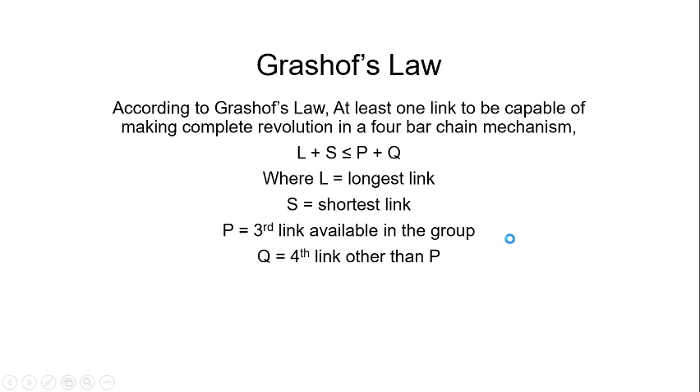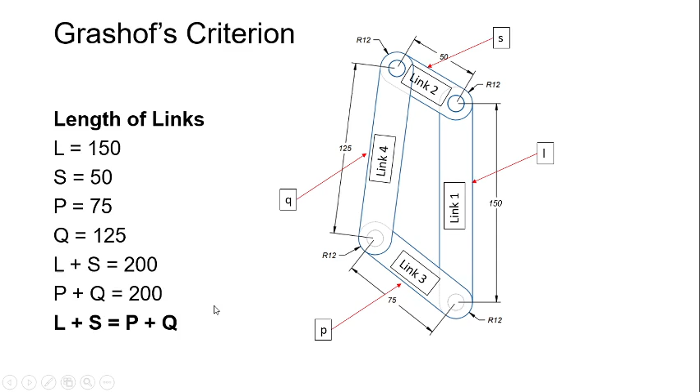Earlier we used the longest link as 145. Now I am going to use a bigger value, that is 150, and remaining all dimensions I am maintaining the same as before. So by doing that I will get L equal to 150, S equal to 50, P equal to 75 and Q equal to 125. So L plus S equal to 200, P plus Q equal to 200, and L plus S equal to P plus Q. So we are going to evaluate whether it is possible to make a rotation or not.

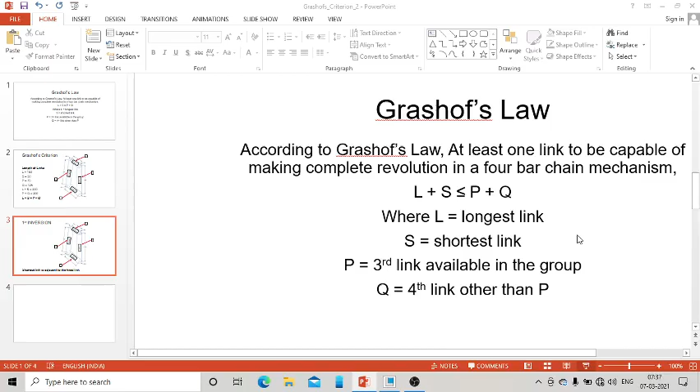In this particular video I am going to use all the examples which we have used earlier, the same links. So what I have done is I have copied that folder and deleted all the assembly.

Now if I go for new, before that let me modify one of the links. So the long link I want to modify. Open this.

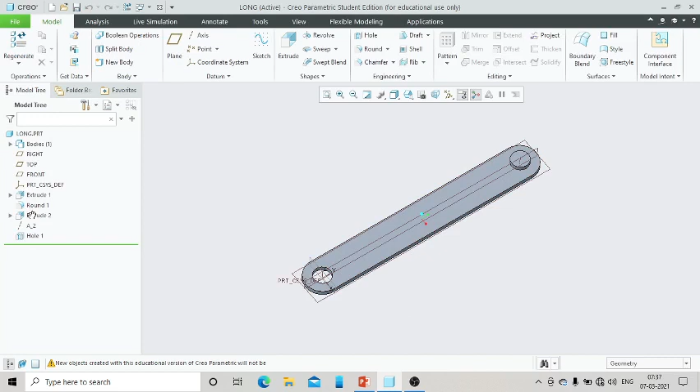Edit definition. So this 145 I am going to change to 150. Remaining all the values remains the same.

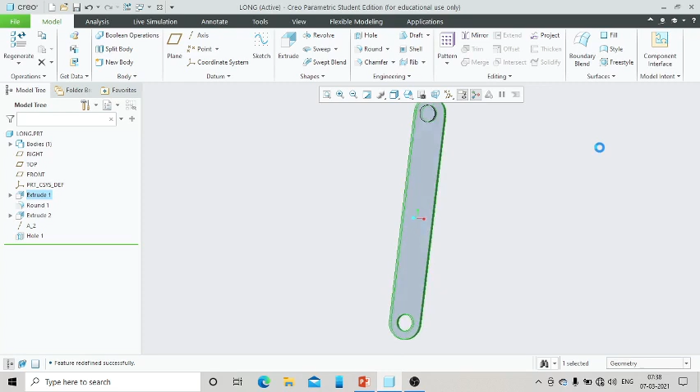Control D, so this is the default orientation. Regenerate, save. Then I want to prepare manage file, delete old versions. Yes.

File, close. Now we are going for new assembly, and this is let us go for the first inversion. Mechanism 1, okay let it be 1, 4-bar mechanism.

MMNS ASM design ABS, description, okay, Grashof.

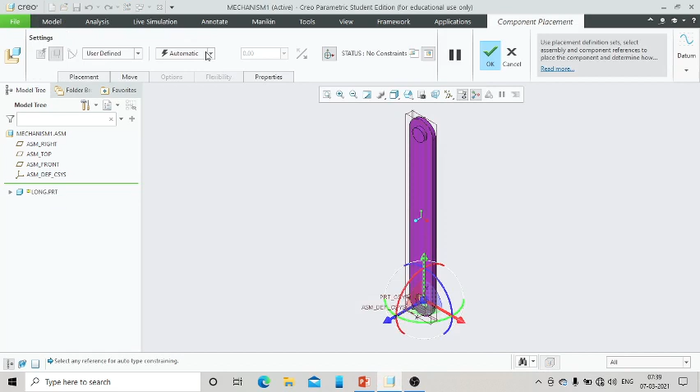Then okay, let us assemble the L link, long link, open. Then this one we are going to make it default.

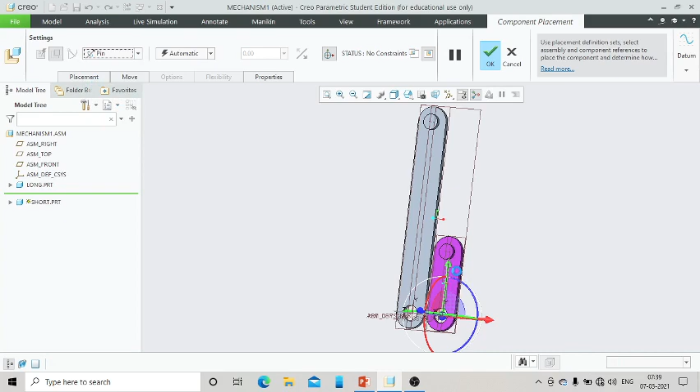Now we are going to assemble once again. Now we will assemble the short one, open. Then we are going for pin joint, pin joint. So this axis and this axis.

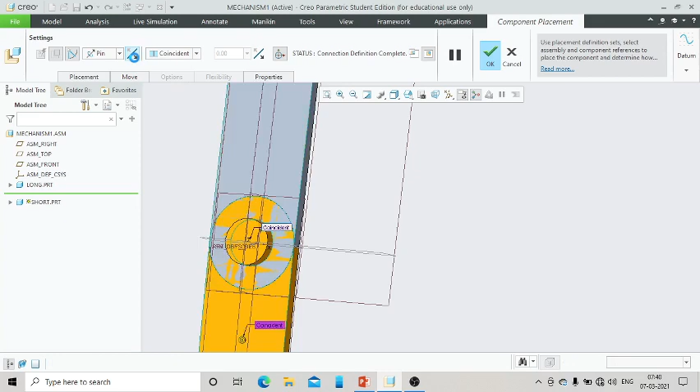And one more, that is this face to this face, flip it. Not here, I think this one, right? So then okay.

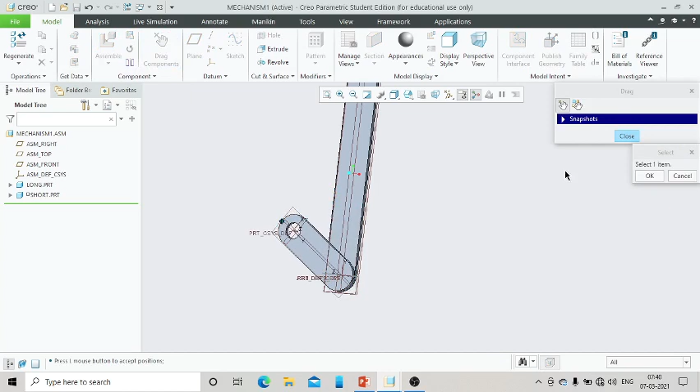Now I want to move it. Okay. Now we will assemble where it is our link.

Okay, it was the short link was here, so let me modify that one. Edit definition, then placement, so axis, let me remove this, and here. Okay, so this we have done it.

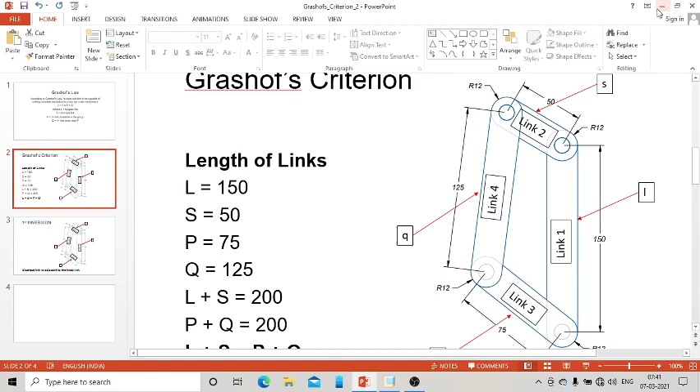Now link 4, the long one, that is Q. Let us assemble the Q link. So assemble Q link, open and okay.

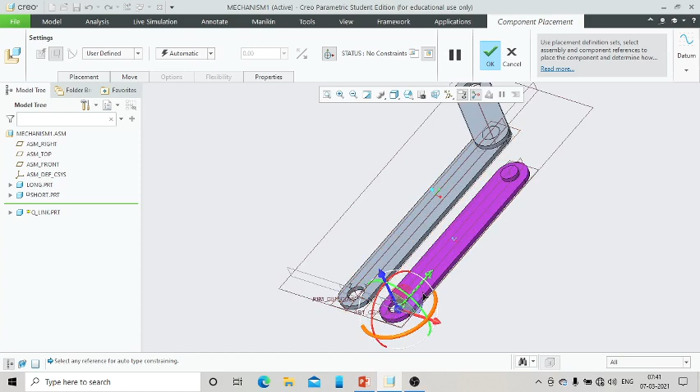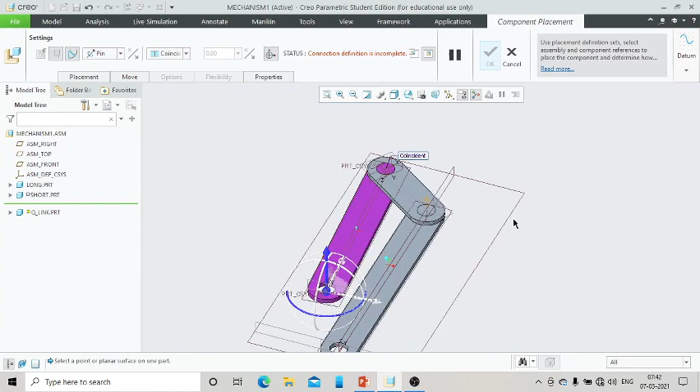Or shall we assemble Q first? Okay, let us assemble this. So here pin joint, so this axis and this axis here, this face and this face. Okay.

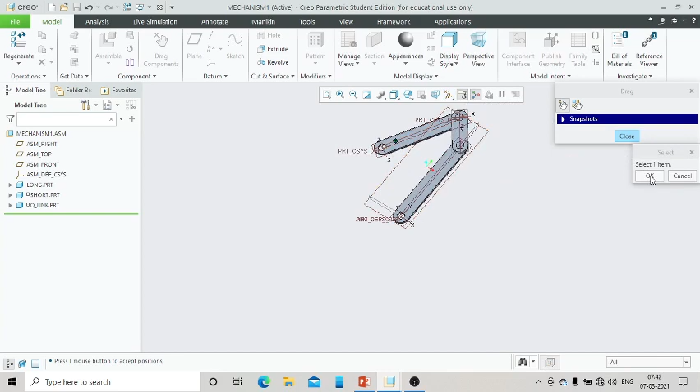Okay, now the last link, I think there will be some problem here. Okay, let us assemble first, then if there is a problem we will edit it.

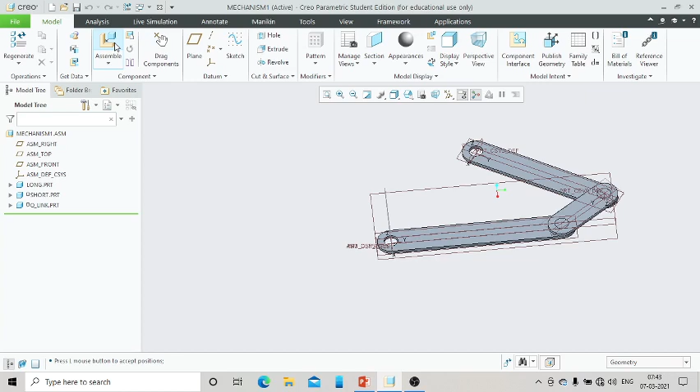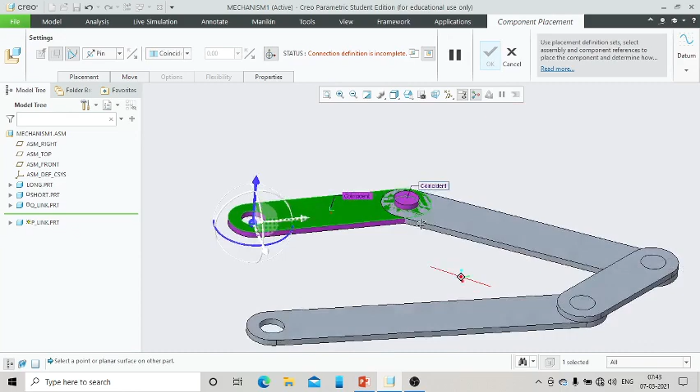Assemble, so P link, open. So now go for pin joint, so this axis here and this axis, this face and this face.

Again one more, go to placement, new set. Okay, I think I'm not getting the axis, so what I will do, I will select this. Oh, okay.

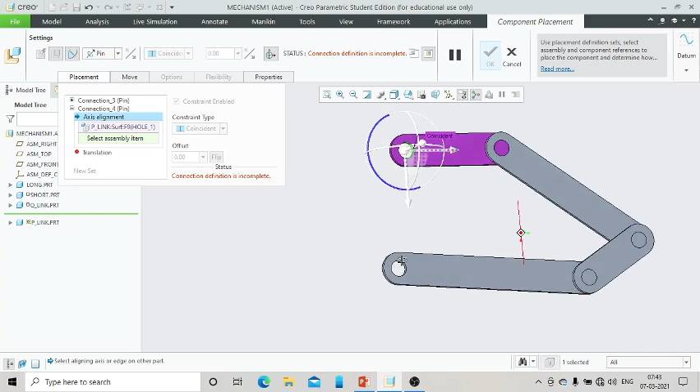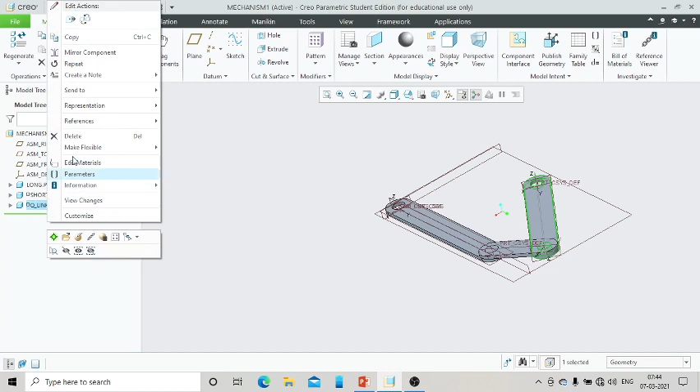Okay, I think I made some mistake, so let us cancel it. Yes, so this also, let us remove this. Okay.

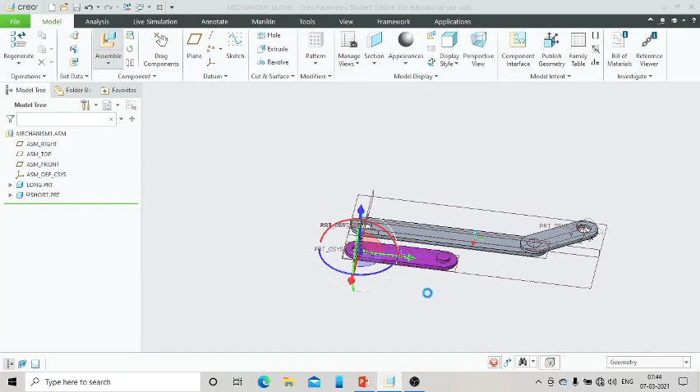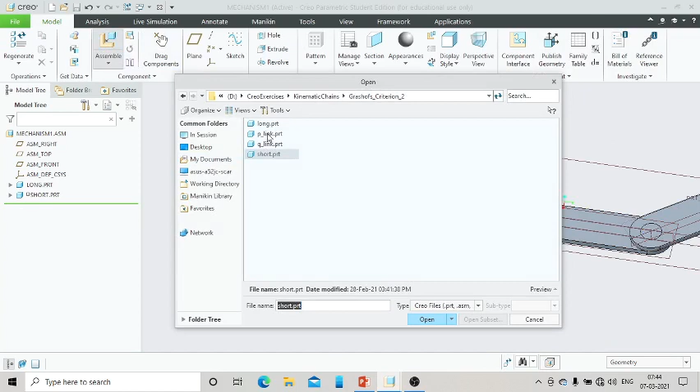So go to assemble, let us go for the P link, open. So let us assemble this axis with this axis here. Sorry, this, cancel. Okay, so assemble once again, just go for the P link, open and go to pin joint, pin, and this axis with this axis here.

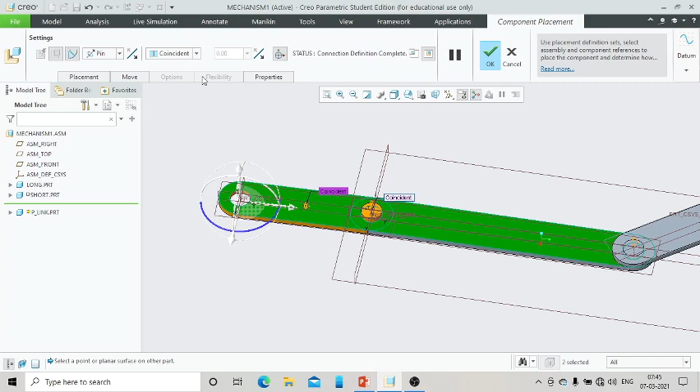And this face and this face, flip it. Okay, then drag the component little bit, drag and place it.

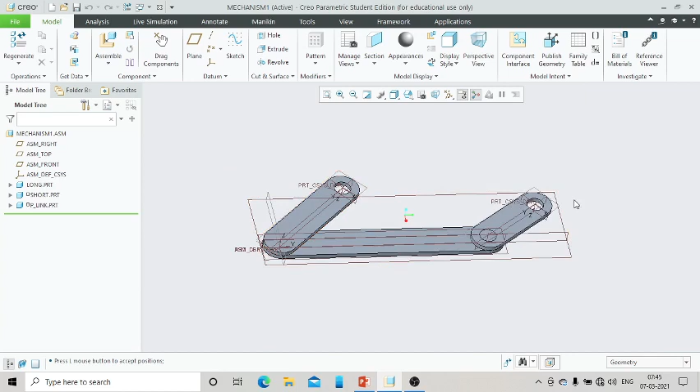Okay, I think here both are having the same hole configuration. So what we will do, we will open the Q link, open, and here we will add a boss here. Extrude.

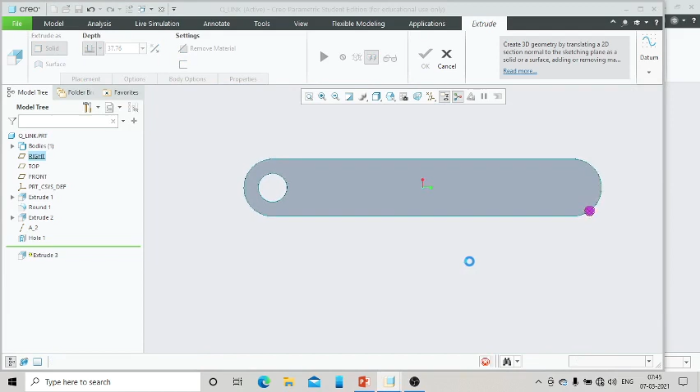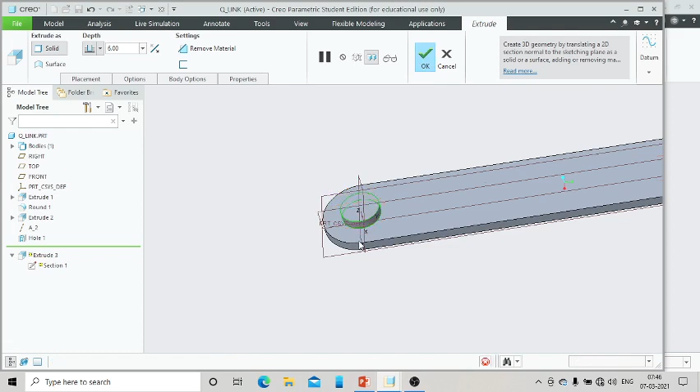Placement, define on this face, sketch, project, close, finish sketch, flip direction, this one I will give 6, enter, okay, then save it.

File, manage file, delete old versions, yes, file, close. Okay, now we will assemble the Q Link, open.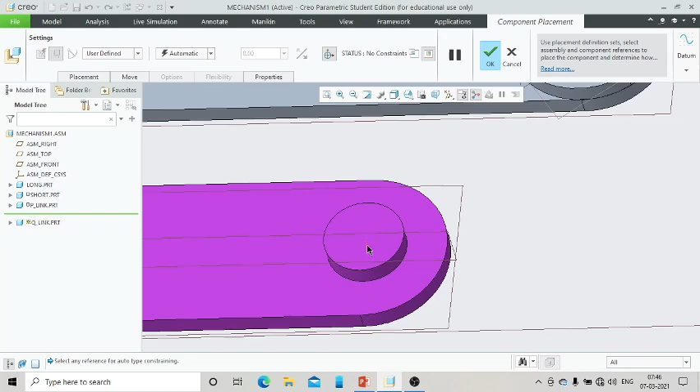So now we will select this, so first we will go for pin joint, and this axis and this axis here, this face and this face, flip it.

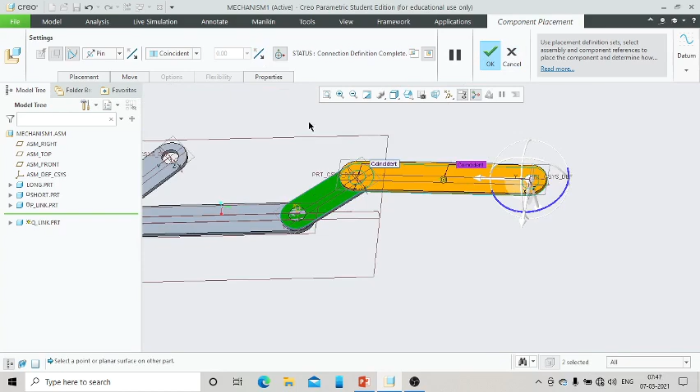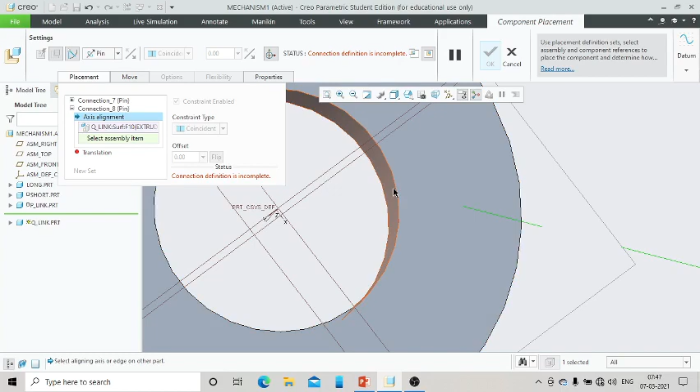Then let us go one more time, placement, new set, okay, this face and this face, this face with this face, then okay.

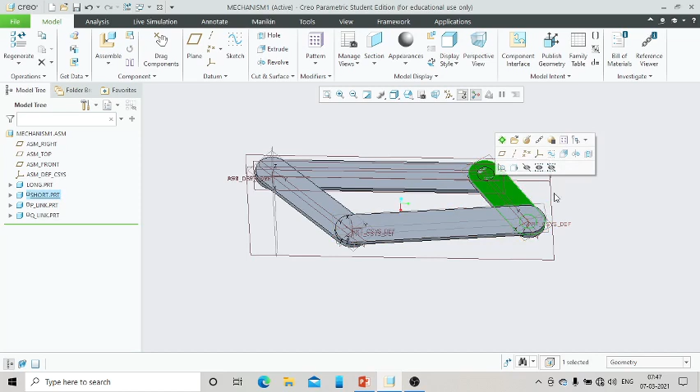Now we can just drag it to check. Drag components. Okay, now this is also working.

Okay, so now let us apply the motor. So before that, let us turn off these planes.

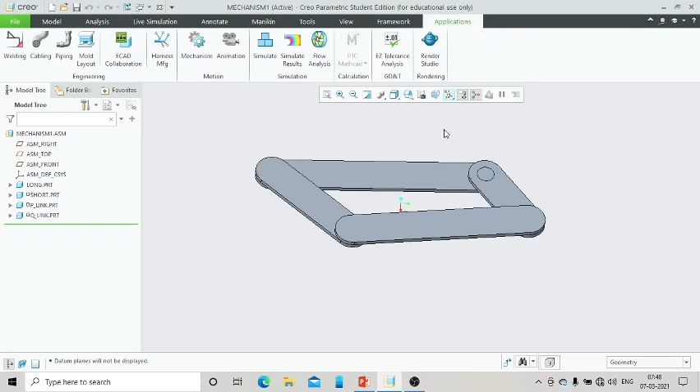Now go to applications, mechanism, and servo motor. Then we will apply the motor here.

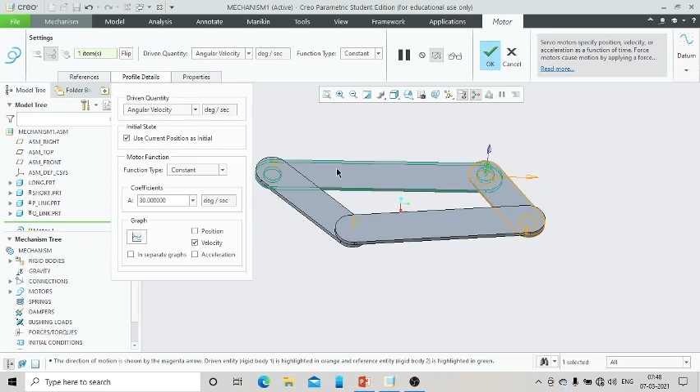This we will change to angular velocity, then profile details, here coefficients we will give something like 30, then enter, then OK, mechanism analysis, end time something like 60, run.

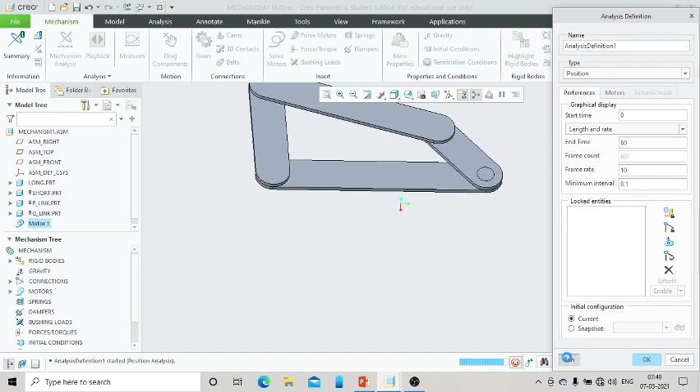Okay, so now we are getting, in this particular exercise also we have verified that this link is making a complete revolution.

So we will evaluate the next condition in the next video. Okay, thank you.